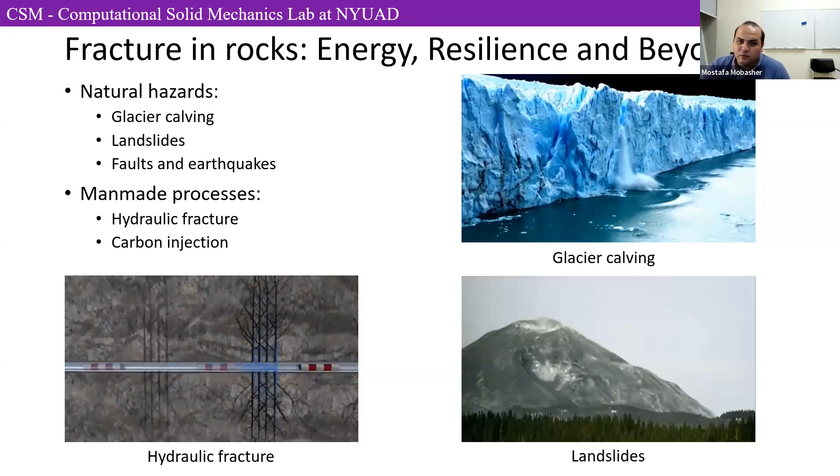Now, among the many challenges in modeling damage or fracture in geomaterials, these are probably the three biggest ones, and the interests of research in my group. The first is the need to understand that fractures are not just thin lines between rock granules, they're really networks of long-range cracks and microfractures that spread spatially and across scale. There are also networks of fluid flow. Depending on the material, there are capillary networks across scales that transport fluid from one place to another. Many existing models do not account for that. So in the research I'm going to present, we propose to account for these effects using non-local modeling for both the damage processes and the fluid infiltration.

The second challenge, which I'm sure many people are aware of, is the elevated computational cost. The more physics you put into the model, the more nonlinearity and thermal or fluid effects you add, the model just becomes prohibitive, we cannot train them anymore. So how do we address this? How can we leverage the newest tools to make this better? And the last challenge, which is not very well appreciated in the community, is understanding the energy budget.

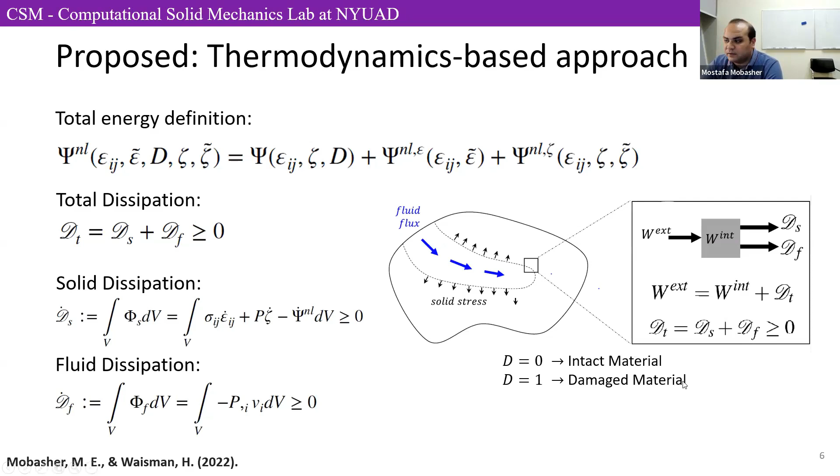Here in the work I'm going to be talking about, I'm basing it on continuum damage mechanics, which is a branch of modeling fracture. The simplest thing for those who are not aware: we assume there is a scalar variable that controls the stiffness of the material. When this d variable is equal to 0, it's an intact material. When it's equal to 1, it's a damaged material.

Now we proceed with the derivation. As I said, the first term is the classical damage poroelasticity term, which has been presented in the literature before, and this is the expression for it.

And then we have two additional terms, which depend on the difference between the local strains and non-local strains, as well as the gradients of that variable. And similarly, the difference between the local volume of fluid storage and the non-local volume of fluid storage, as well as the gradient of that variable.

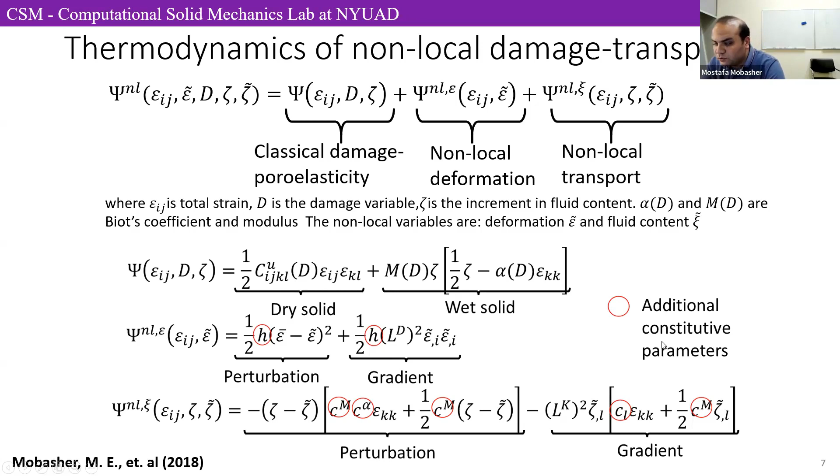And in order for us to introduce these additional energy terms, we need to also introduce some additional constitutive parameters. Now, in the limiting case, and we proceed with our derivation with the Clausius-Duhem inequality with the first and second laws of thermodynamics, we arrive at modified stress-strain relationships and modified pressure-zeta relationships.

But in the limiting case, when we want these models to represent what we are currently modeling, if you take these models in the limit where these additional constitutive parameters go to 0, we actually see that these additional terms drop out, and we end up with two additional gradient relationships. The first one is for the strain or stress regularization. The second one is for the non-local transport effect.

So now let's look at each one of these. The first one provides the non-local damage. So here, this is the stress-strain relationship, and this is the pressure-fluid content relationship, both of which are a function of damage.

In this case, we start with a simplistic linear law for damage, but in other papers we use other phenomenological models for damage, and we calibrate and validate these. Then we have a non-local equation, a gradient equation, which provides the non-local stress of which damage is a function. And then we have the damage-dependent Biot's modulus and the damage-dependent Biot's coefficient.

And the purpose of these relationships is to basically represent what happens in the fracture process zone. This is a function of a region which represents the size of the fracture process zone, represented here by the variable g.

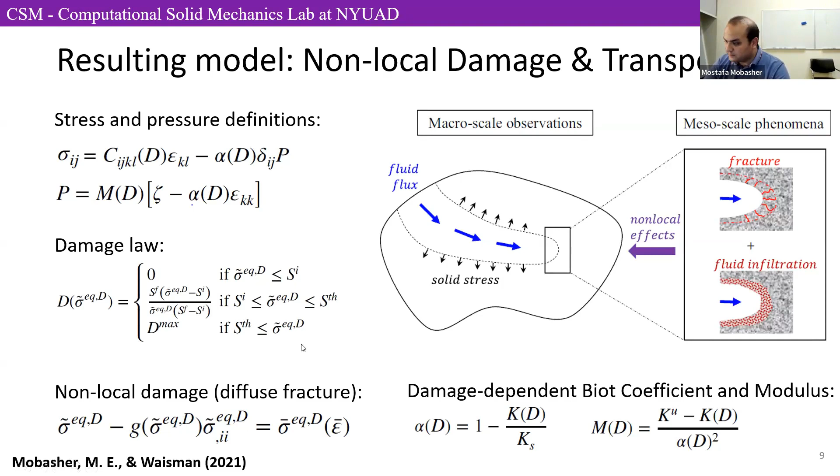Now we get to the less common concept, which is the concept of the non-local transport.

When we put simply Darcy's law or even other types of fluid flow in porous media, we're basically assuming that the fluid flow at the material point is only driven by the values of the stresses, strains, or permeability that we are calculating locally. In reality, porous materials do not work like that. There are scale effects and porous network effects.

Several experimental and numerical models have shown that in order for us to understand better what's happening, we need a non-local transport, and there are different ways of doing that. We need to understand what's happening in the vicinity of this point and based on that, calculate where the fluid particle will go. Now we're dealing with Eulerian models here, so we don't really track a particle, but we can still plot the streamlines of where the fluid goes in a hydraulic fracturing simulation.

So here we are proposing this based on the thermodynamic derivations that I have postulated. We can reduce them, instead of the relationships on the fluid content, to a non-local permeability, which we have then extended to an anisotropic non-local permeability, with the mathematical proof here.

After we did this work, we found out that this relationship is very analogous to the Darcy-Brinkmann flow equation. We realized that the size of this interaction zone is L squared, and this L squared would be equal to beta, the friction coefficient in the Darcy-Brinkmann flow. We actually discovered this the other way around: we started from the non-local modeling idea, and found the resulting thing is very similar to the Darcy-Brinkmann equation, with the friction coefficient providing a very similar effect to what we're proposing with the non-local effect.

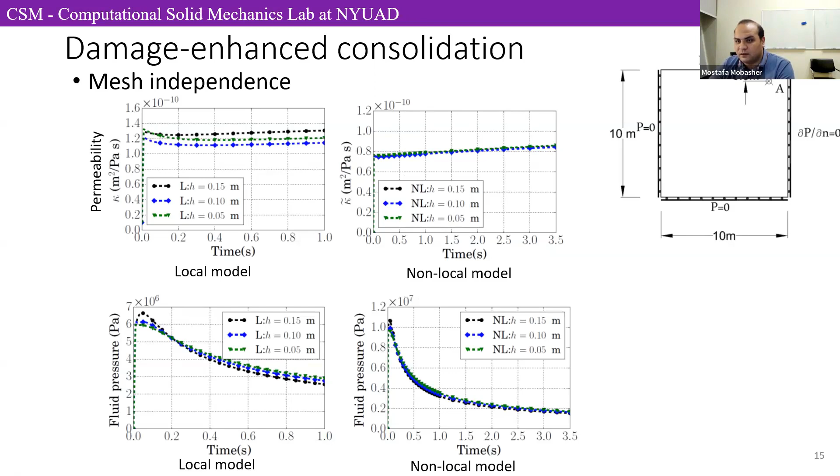It's achieving what it is supposed to achieve in terms of representing the physics. Now we get to the next question: what happens to the energy? We're pumping fluid, so we are spending energy here. Where does that energy go?

So where does that energy go? If you go back to the initial diagram, we have a W external applied, and that gets spent either by elastic energy stored in the system, or, up to this point, our model does not have... or energy that's being dissipated.

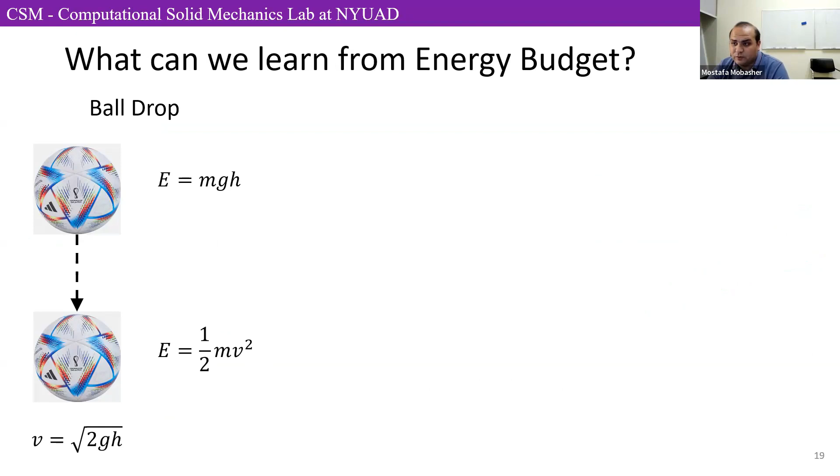In applications which involve tremendous damage, like hydraulic fracturing, or car crash worthiness, knowing where the energy goes is pretty much everything. You need to design your system to dissipate the energy in a certain way.

In hydraulic fracturing, we also want the energy we're applying to be used to stimulate the reservoir. We don't want to just spend the energy on opening networks or on fluid viscous flow through a network that's already been opened, without getting any bang for the buck.

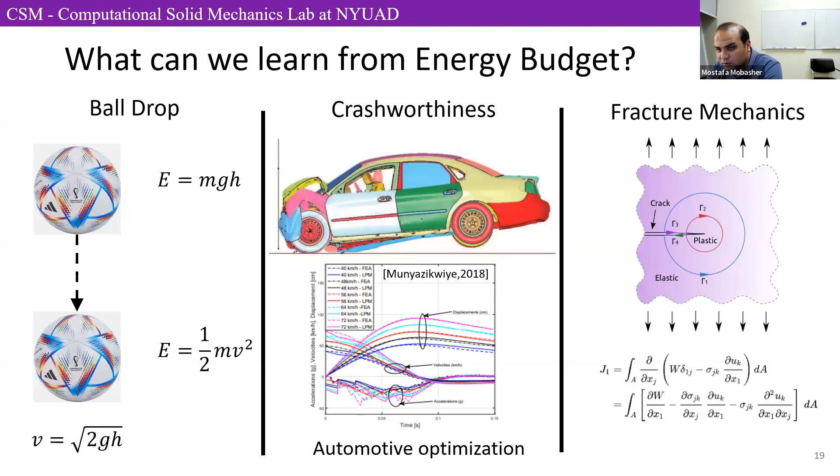And this gets us to fracture mechanics, and the fracture mechanics theories themselves are postulated from the concept of energy. So how is the energy spent? That's the question we're trying to answer.

There are some studies out there, but really limited. One is experimental. There's another by our chair, Professor Bunger, also based on linear elastic fracture mechanics, so it doesn't account for fluid flow, permeability changes, or the multi-scale networks that are happening. So there's a need for a better way to understand the energy budget in hydraulic fracturing.

And this is what we're trying to do here. Since our model is based on thermodynamics, we have access to these mathematical formulations. We can compute them numerically and see what happens. So let's start by playing a bit with the model we've postulated.

Let's take the Q, the injection rate, and increase it to Q, 2Q, and 3Q. Here I have two plots: one is the length of the fracture versus time, the other is the volume of the fracture versus time. As expected, the faster you pump, the higher the Q, the higher length you get—say at time 0.2 by 10 to the 5—and you'll get a longer fracture and a larger volume.

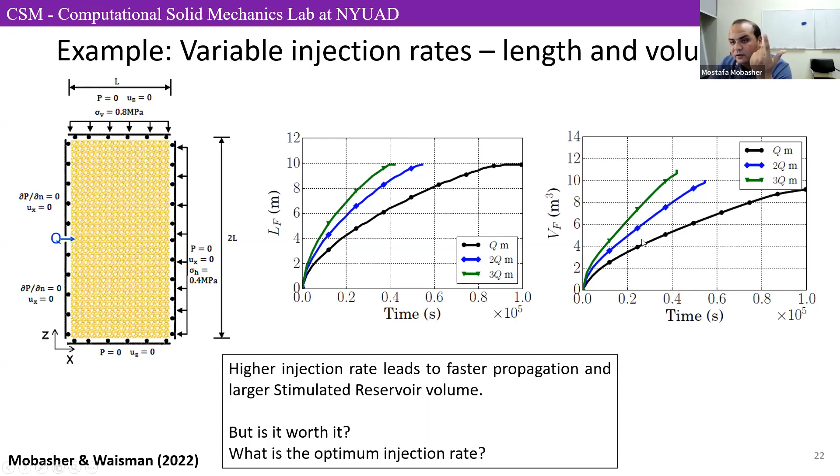Another thing we started looking at is how the fluid-driven fracture interacts with pre-existing weak zones. We consider two weak zones. The first one we call weak zone A. In this case, we have an intact stiffness but high permeability. This means we have another type of rock, geomaterial, or soil material with higher porosity - like going from shale to a part where there is sand. So it's a high porosity zone, but it's still intact, still has high stiffness. The other one is pretty much an open fracture - low stiffness, high permeability zone, like a pre-existing fault, either man-made or natural.

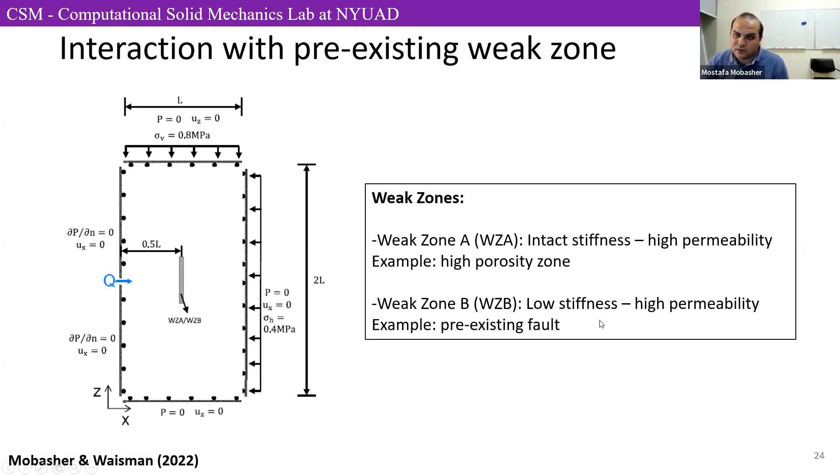We started running our model. We got the damage or fracture contours, and then compared them to fractal analysis and some acoustic emissions. Our results are pretty much on the same ballpark - we see the same fishtail trends, the same trends overall. There are more details on the specific verification and validation that you can find in these papers.

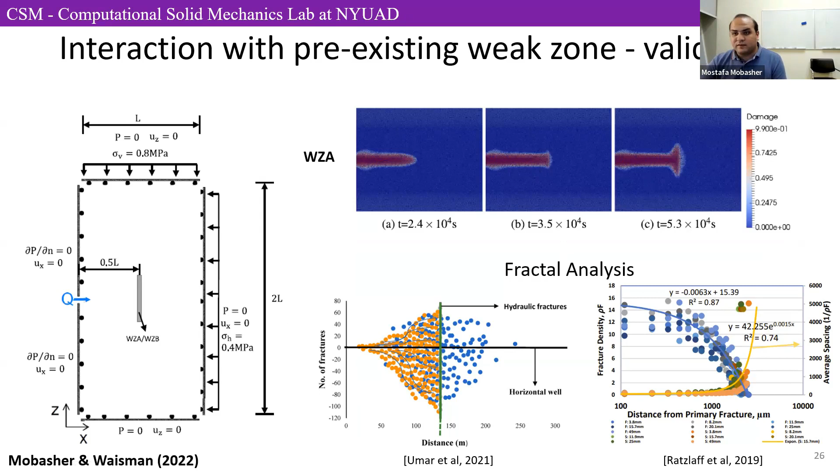Let's look at the energy. Let's look at the money that we're spending into pumping. Where is it actually going? Are we actually gaining what we are trying to gain from this?

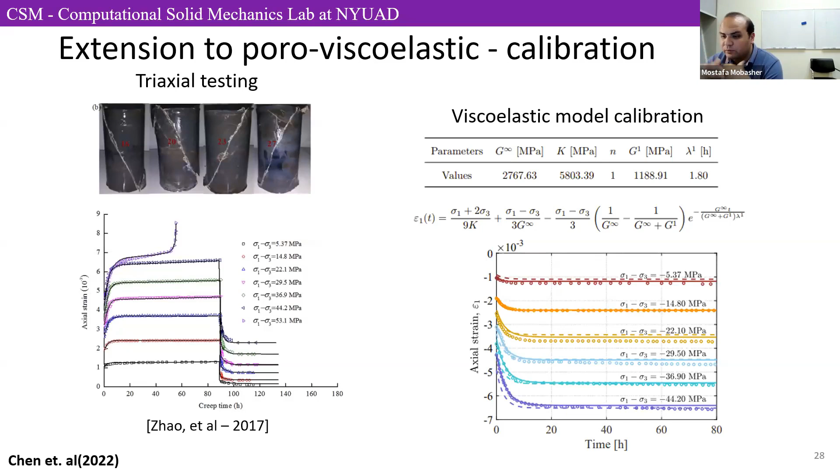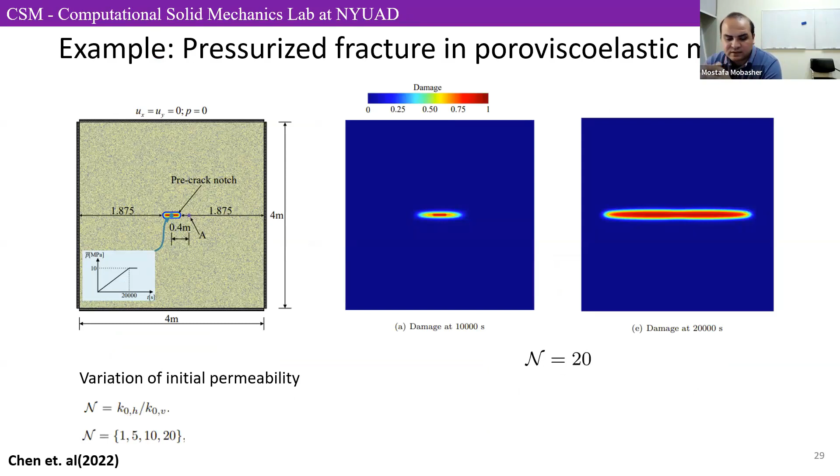We took the same model and started extending it to more complex material properties. We understand that in some cases, viscoelastic effects, time-dependent effects are important. So we calibrated the model's viscous parameters with triaxial testing data from the literature. We calibrated the parameters, then started testing with different ratios of initial permeability and different values of viscous response. Here we have different values of permeability anisotropy - n equal 1 is totally isotropic, up to n equal 20, which is very anisotropic between the vertical and horizontal direction.

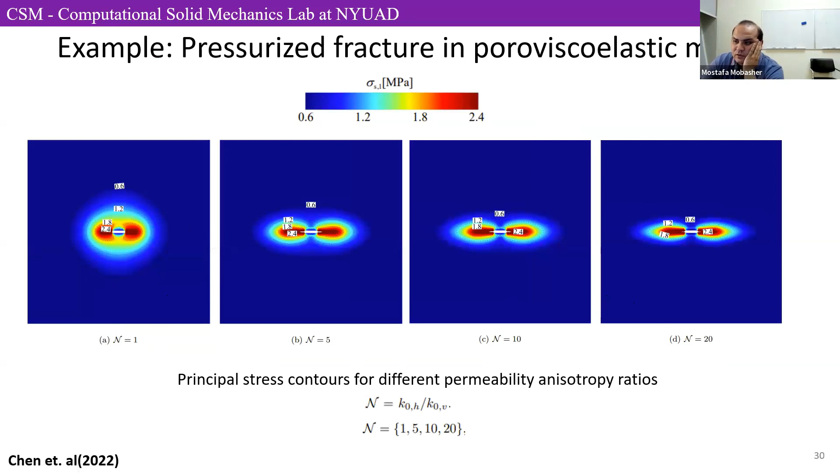So to conclude this part, what we're trying to say is that looking at fluid-driven fracturing through the lens of the energy budget could be enlightening and could show us different physics than what we see just by looking at our traditional models, especially those dominated by just linear elastic fracture mechanics. Once you start including these additional nonlinearities in the model, you start getting better insights.

Now, if I'm a practical person - and as I said, before coming here to NYU Abu Dhabi, I used to work for the industry.

Okay, this is great. All of this is great, but these models, we cannot run them in practice, period. They're very expensive to create, very expensive to run. The size of the domains we're considering here are very unpractical. These simulations take hours, days, maybe weeks to get a reasonable answer.

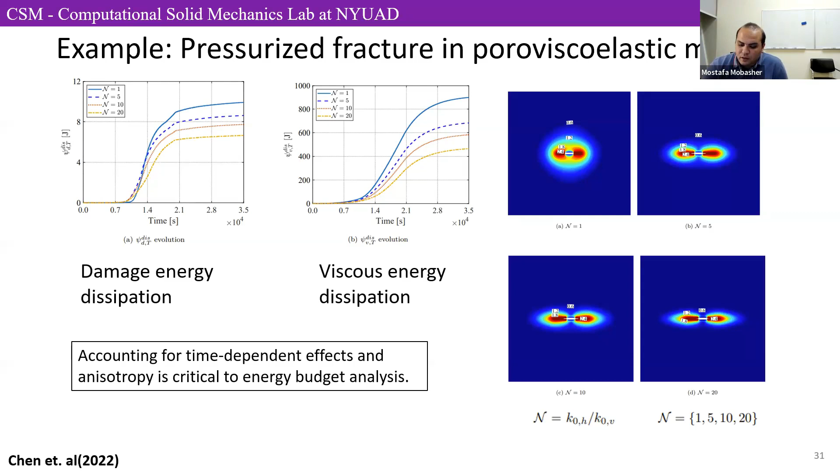So what are we going to do about it? Which brings me to the next step. Our group has started a new endeavor, which we call integrated finite element neural network. Basically here, we're trying to leverage neural networks not to replace what we are doing with the typical analysis, but to improve the current state of the art of nonlinear and multiphysics models.

But keep in mind that this neural network will still sit within the same framework. So it's not going to give me an answer just based on the network predictions. It's going to give me an answer based on the minimization of the residual, which represents the weak form, the residual equation, which then conforms to the physics that we are trying to solve at the end of the day. That would be, in our minds, that would be great.

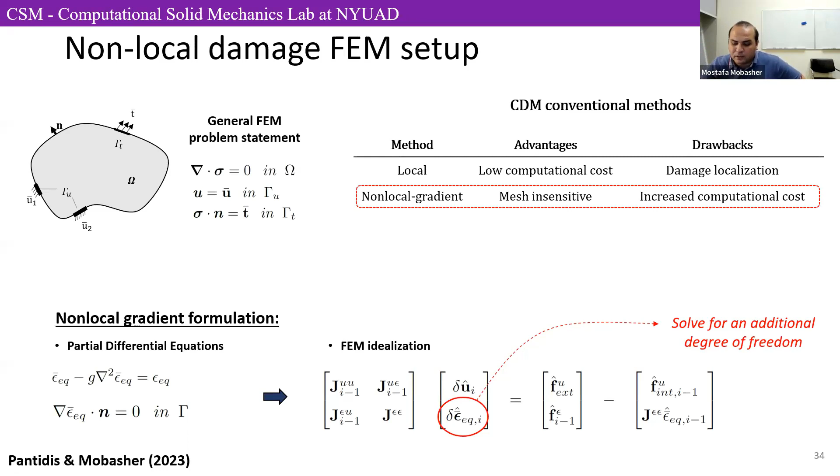We trained a neural network to basically represent this equation using a physics-informed neural network. In this case, we're talking about sequential MLP, multi-layer perceptron networks, for every time step, which is, of course, very expensive, but we're going to improve that in a second. This is to do the mapping between the local strain and the non-local strain.

And once the non-local strain is calculated, it is plugged again into the same elasticity equation, damage equation that we have. By doing this, we have eliminated the second equation. We've reduced the size of the system of equations that we're solving, but we're solving the same system. And while we're doing this, we are predicting the non-local strain and also its derivative, and plugging it in.

Now, the actual test of whether this is working will be: well, does this I-FENN system converge? Does it work? Does it give us the right answer? Which we'll see in a minute.

So for every time step, we're training a specific network to predict that, which of course is very unpractical, but it's our first step as a proof of concept.

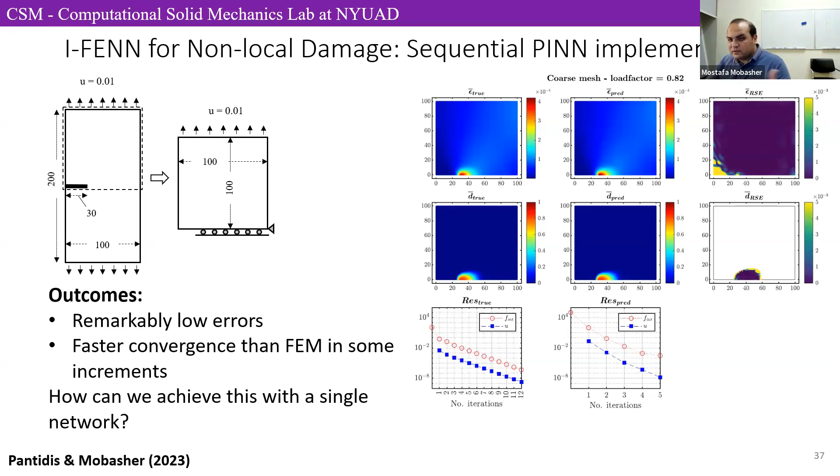Now the question is, how can we do all of this with a single network? How can we train just a single network that can do this problem for us for different loading cases? Which got us into what we call now the physics-informed temporal convolution network.

Now, this is another type of sequence-to-sequence modeling that we introduced to learn physics as well. I don't think we have the time here to explain the specifics of temporal convolution networks, but this is in the literature, and this is not something we came up with. The temporal convolution networks were there. We made them more enhanced by introducing the physics-informed character to them.

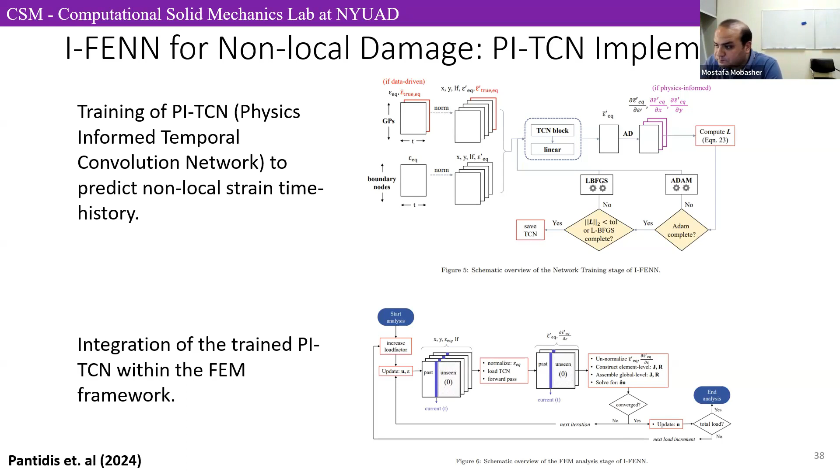And then we involved them again into our finite element analysis procedure, and then we started solving the same problem again. So for the same problem, again, we're seeing very consistent convergence. We started seeing time savings, which here are not great, but they are starting points.

So we're talking about 10 and 20% in the very first trials of the method. This is something that we can build on. We started modeling other geometries, other loading conditions.

So, as our cracks get longer, as our damage zones get longer, we usually have convergence issues. Sometimes the finite element models do not even work. They are unable to give us results, or they take too many iterations or too much time per increment.

What we have seen is that the I-FENN, even when finite element is struggling, when we try different solvers, I-FENN is doing pretty well, and it's giving us a very efficient solver at the end of the day.

So now we have done this for non-local damage. We are currently working on developing this for poroelasticity, but before that, we wanted to try with a bit of a distal version of that. So we started with thermoelasticity, introducing thermoelastic effects. Again, the idea is very similar.

We are solving the mechanical weak form. We're solving the mechanics problem, and we're using the neural network to predict the temperature and plug it back into the mechanical equilibrium equation as an input, and use that to solve the problem.

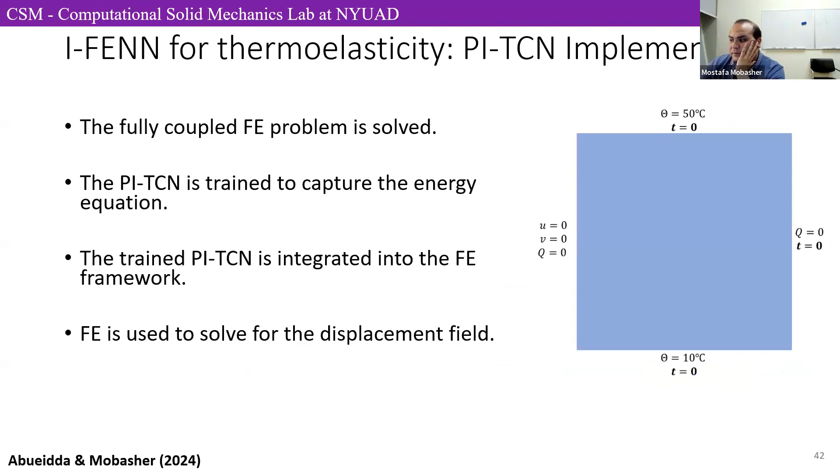This is our first trial problem here, just a plate with some boundary conditions, and we're getting very interesting results. Basically, we're training the model on a coarse mesh of 700 elements, and then we're trying it on a 7,000 elements model. This is something that we usually need in practice.

In order for us to resolve the stresses and know what's happening at the crack tip, we usually need very fine meshes. But in some cases, modeling such physics on their own can be done on coarser meshes, and these two solutions can be combined.

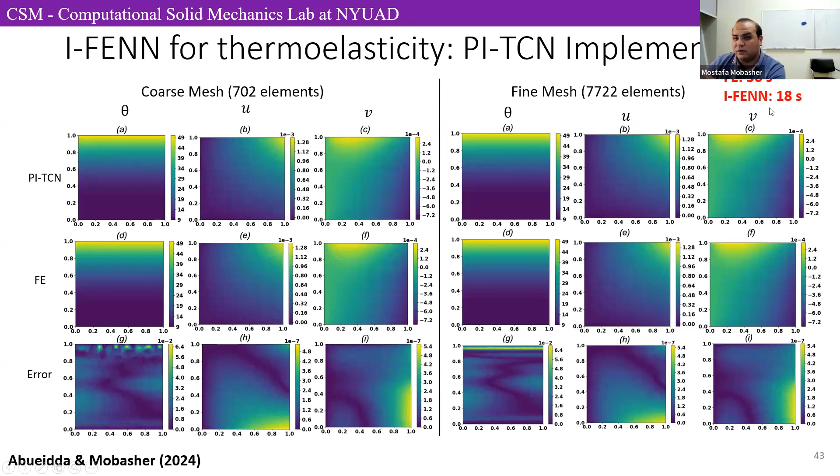So long story short here, finite elements is taking, for example in this case, 36 seconds, where I-FENN is taking 18 seconds. So we wanted to test this further.

We extended this not only with the PI-TCN. We have another paper coming up where we introduced a network that learns from the variational form. So it learns from the energy principles of thermoelasticity, which we think will be very valuable once we get to poroelasticity as well.

We also tried to replace some of the automatic differentiation that the neural networks are usually based on into learning using some pre-computed shape functions, since we already have the finite element models, or we have access to them and we can use them.

These are our initial trials. SFAD is the first model, and as we go further downward, we kept becoming more competitive with the finite element solutions.

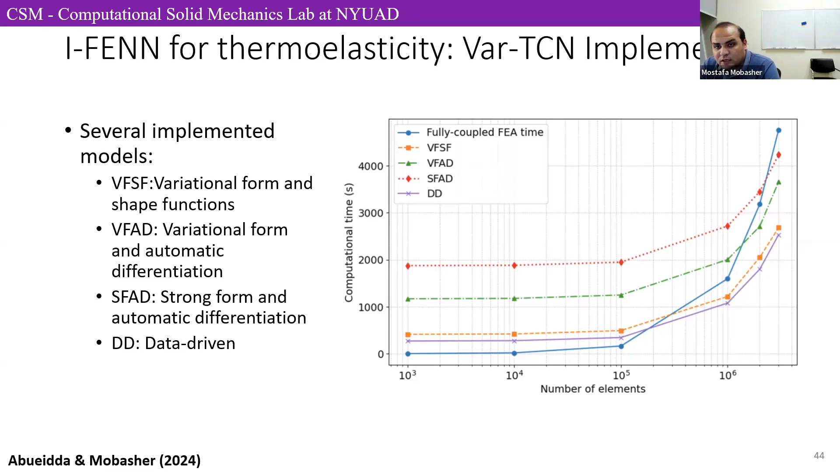So this brings me back to the starting point. There are three challenges we are trying to address in this research: representing long-range interactions in terms of damage mechanics or fracture mechanics, the elevated computational cost, and understanding the energy budget.

For the first one, we are proposing non-local models to help us understand what happens around the crack tip in terms of fracture, damage, and fluid transport. We're able to verify and validate that model against some available experimental data.

We started using this model since it's formulated from thermodynamics principles, so we are able to analytically derive the energy storage and energy dissipation formulas, compute them analytically, and get insights from them. We have presented that as well.

Realizing that as we add more physics and more nonlinearities, our models become very expensive, we're now working on this new idea called I-FENN, integrated finite element neural networks, in order to limit the cost of these simulations. It's all work in progress.

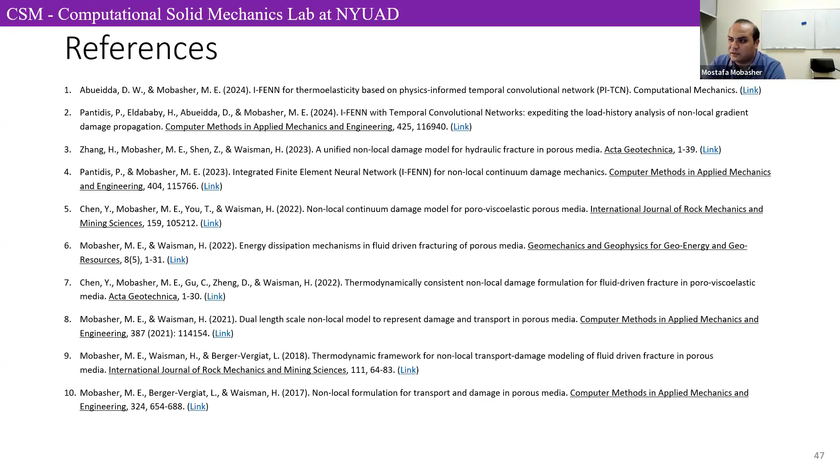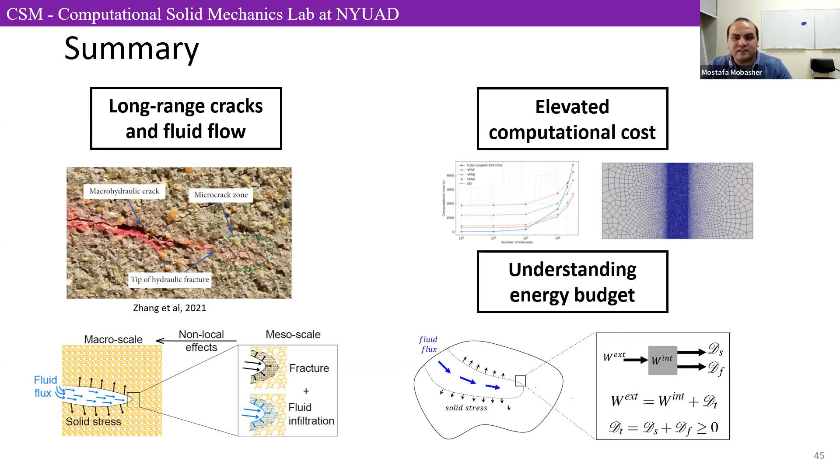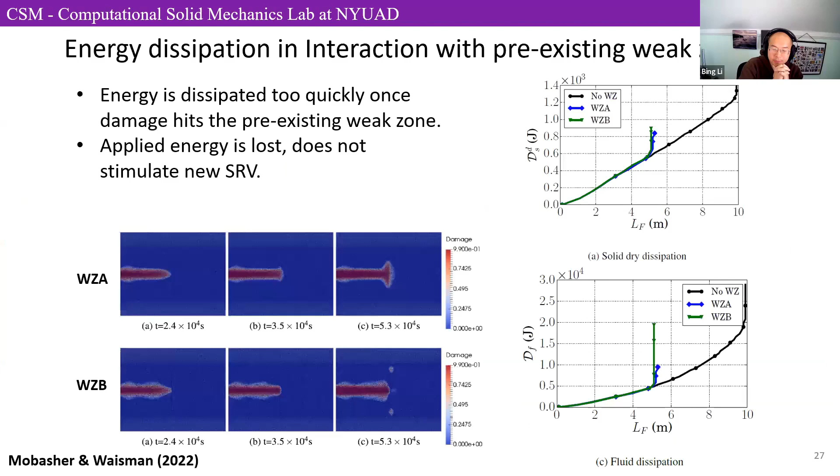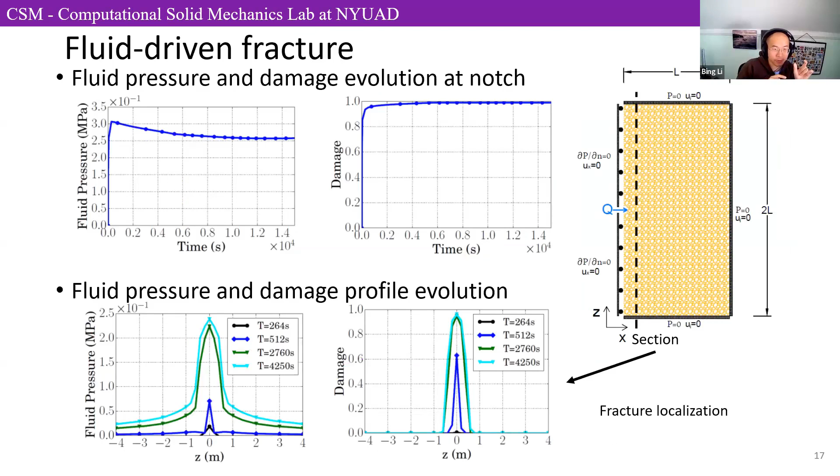So on slide 17, you show the damage zone quantification, and you're focusing more on the length of that damage zone. You were talking about the evolution of that damage zone. I was wondering if you could talk about the width of this damage zone—is it sort of consistent across the geometries or materials and all that?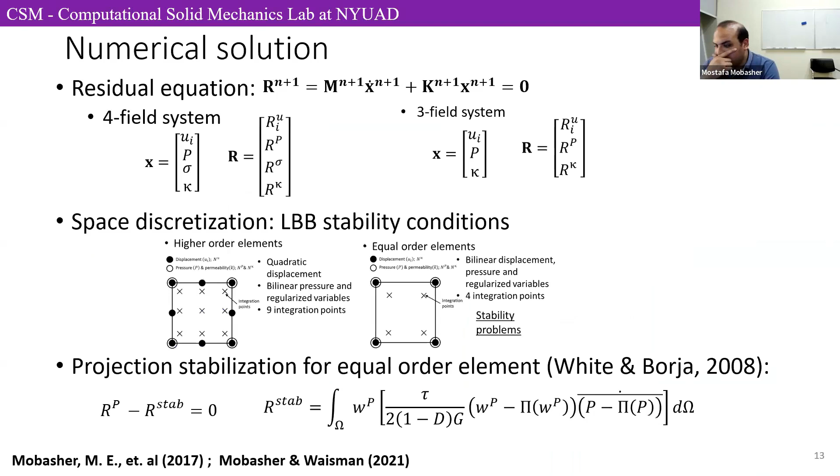So that will depend on several variables. It will depend on the permeability, how fast it changes. It also depends, in this specific model, on the values of the length scale that we use. Let me get back to this—you see here we have two equations, one for the non-local stress and one for the non-local permeability. The non-local stress is what governs the damage, and here we have, in the case of constant, constant and non-constant length scales. Basically, the width of the damage zone will be governed by these two length scales.

We have this paper from 2021 with a specific study on what happens when one length scale is different than the other. You see that in some cases damage overtakes, but then it stops at a certain point if permeability is not going that far, because if you don't have fluid going that far, then nothing will open the crack.

And the same way otherwise. But we see a stronger effect from the permeability length scale than the damage length scale, because when you have a larger length scale for the permeability, you have fluid going into further places.

This is true in the beginning of the fracture, closer to the tip, closer to the notch. As you go further, it develops its own new equilibrium - I don't want to say steady state because it's still a function of time. In our 2021 paper, we have a very detailed study on the interaction between these length scales and what they do to the damage zone and the permeability zone.

This is something I probably didn't say. When you do a linear elastic fracture mechanics model, usually you have an open crack, you calculate the crack width, then put the fluid inside it, and the fluid will exert pressure on the sides. This is how you represent hydraulic fracturing in this context.

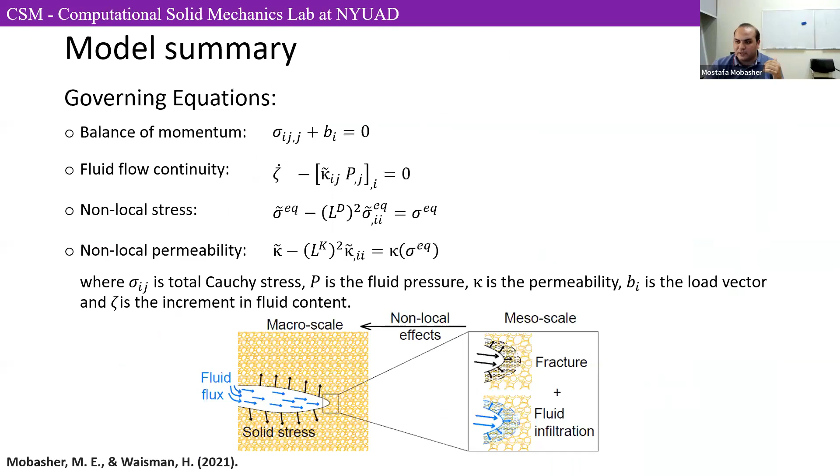Coming back to that real picture from the beginning, it could be, depending on the type of material, the inherent anisotropies and inhomogeneities, the way you frack it, the way you're applying the load, you could have different setups of these two networks. One of them could be larger than the other. It also depends on the multi-scale porosity networks.

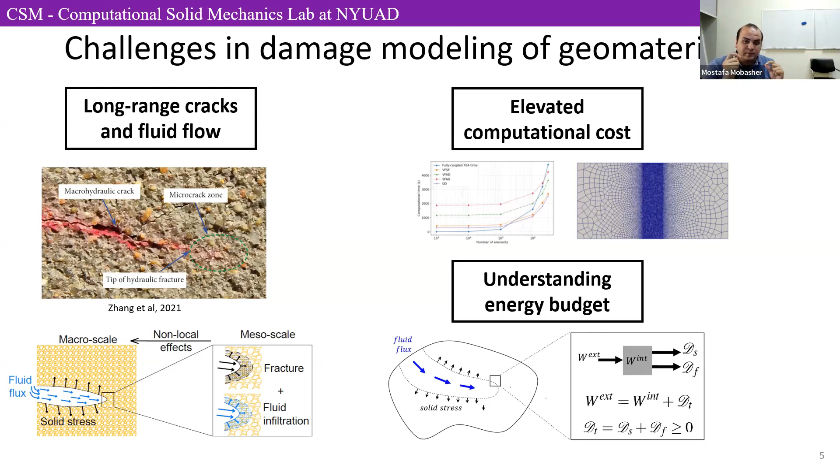So this idea of non-local transport comes in - these capillary networks can be very, very long, and they change the pressure gradient, change your overall permeability, and change how your fluid grows. So just looking at a single material point, we found that to be not very representative of what happens in reality. You need to use a larger lens to understand what's happening.

Very interesting. So the non-local transport is not poroelasticity - it's simply pressure gradient forming in a very predefined path, essentially. Yes, okay, yes, okay, oh okay. Very cool. Sorry, I'm kind of dominating the conversation.

Any questions from the audience? Once again. Okay, if not, I have one more - that's

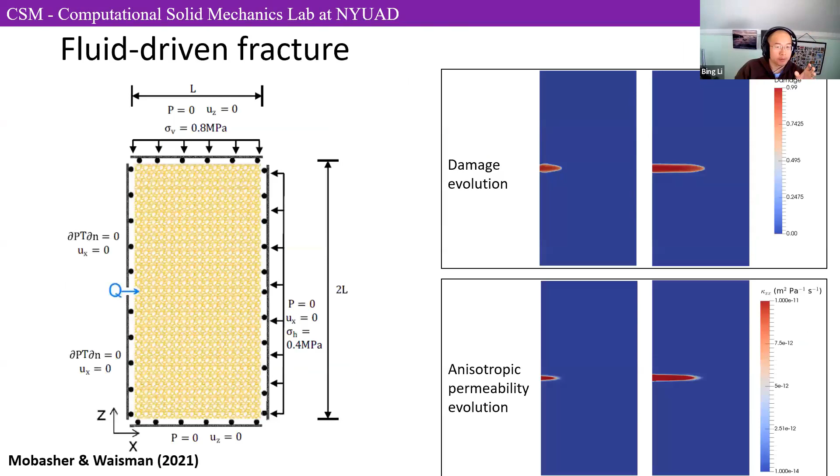A curiosity point: in the PINN, the second one - is that still being trained per geometry, or has it come to a point where it's a general pre-trained network for any geometry? So everything that I've shown so far is trained for a specific geometry.

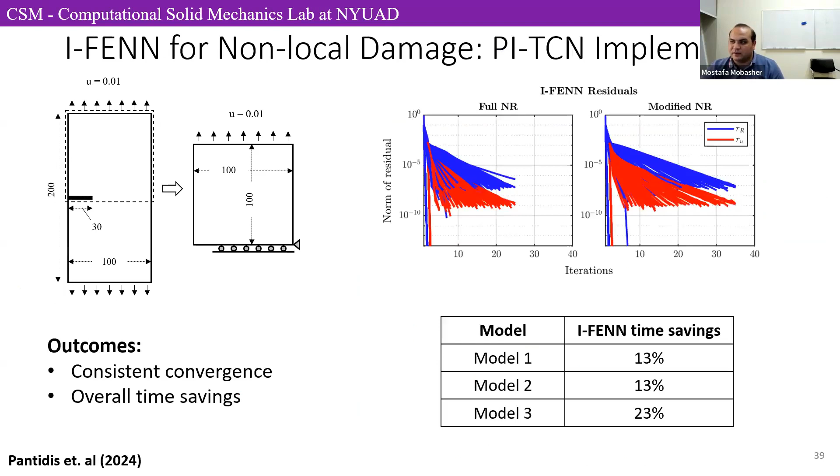We have ways of dealing with that, and there are some methods in the literature that people have started doing. But we see bigger ticket items at this point. There are mapping methods and things you could do to make it learn on one geometry or on boundary conditions. There are operator networks that can help you do that.

There are mapping methods, but we are seeing a fundamental issue with predicting phenomena over time. Right now, the two options available are either using sequential step-by-step networks, where you have to train a step for every network - these manage to predict very well and interpolate well in both space and time, and can even in some cases extrapolate. But it doesn't make sense to train a network for every time step. This defeats the purpose.

So once you start going to sequence models, which can predict over time, they have some deficiencies - they just predict sequence. They were not made for our applications. They came from text recognition, from predicting lingual things. They are not our problems.

We want to have functions that we can use. We need an f of t to understand what happens between t1 and t2. So we are now working with some new approaches fundamentally different from sequence to sequence. We're seeing some preliminary results and some preliminary challenges, and we see this as our bigger ticket items. But the question about geometry and boundary conditions is also very interesting - let me tell you something.

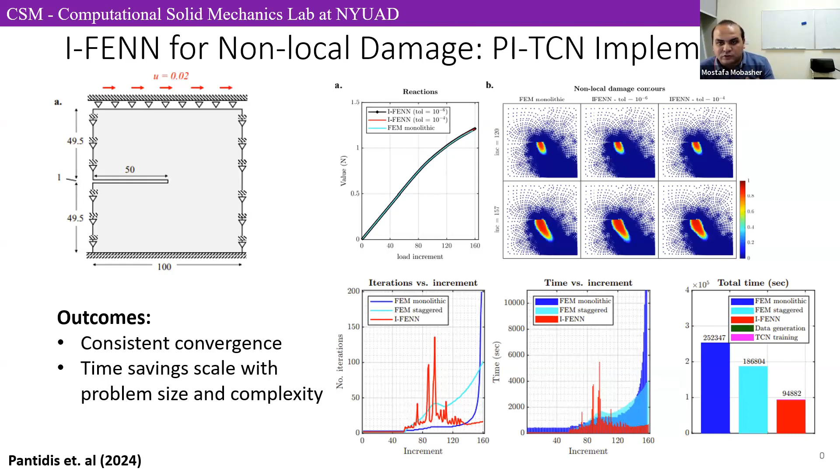Specifically, hydraulic fracturing could be one of the most suited problems for this type of I-FENN formulation. This is simply because, in most cases, our geometries look the same and our boundary conditions don't vary that much from place to place. The confining stresses could be different, but they don't vary that much. It's not like designing a car, where every car has a different geometry. At the end of the day, we work with 2D or 3D planes, with end conditions and confining stresses that can have different values. There are measures of anisotropy that we can make the model learn and randomize with some probabilistic infusions, and we can get away with it. So I think geomechanics is a very good candidate, and there's a lot to be done with neural networks in general and with this I-FENN approach.

Very cool. Richard, you had a question, please. Yes, very good talk, Professor Mobasher.

I was wondering if you had any familiarity with mixed neural network finite element methods, where instead of representing the displacements or velocities using polynomial functions, we represent them using neural networks. These formulations are touted to be more efficient than standard finite element techniques.

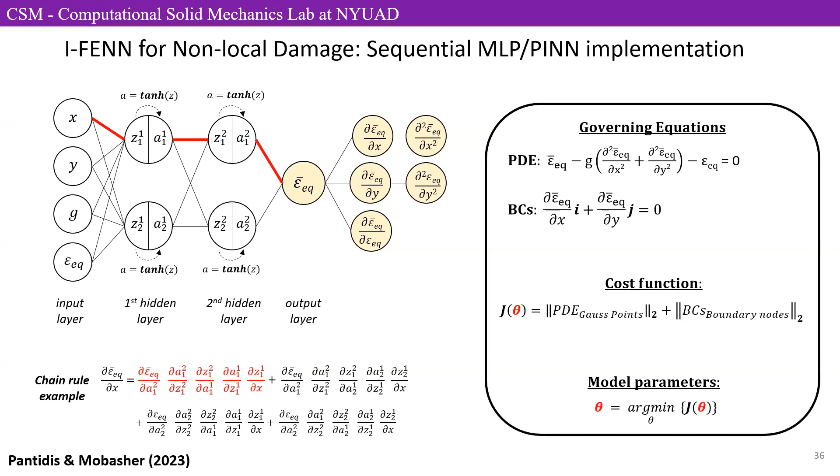Yes, so there are a couple of them. There's a hybrid one, at least the ones I can think of. There's one called HFEN, hybrid finite element neural network method, and another called DEM, deep energy method, and both are doing basically what he said. They're replacing the approximation functions with networks. They're very good, and the papers are very promising.

Now, from hands-on experience, these methods become difficult to scale when you have more practical, more difficult, more nonlinear, more realistic problems. So when you see the papers, they look very impressive on small toy problems. But start introducing something more difficult and it doesn't work, because they lack something. This is my opinion, don't take it as fact - this is what our experiences have led us to conclude.

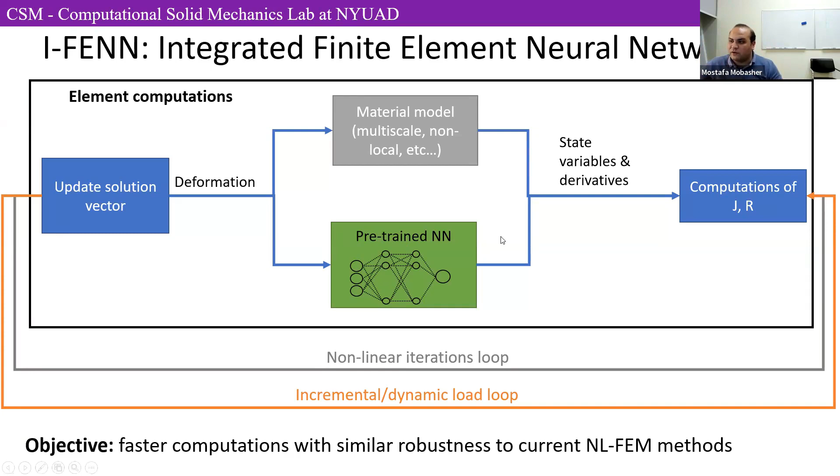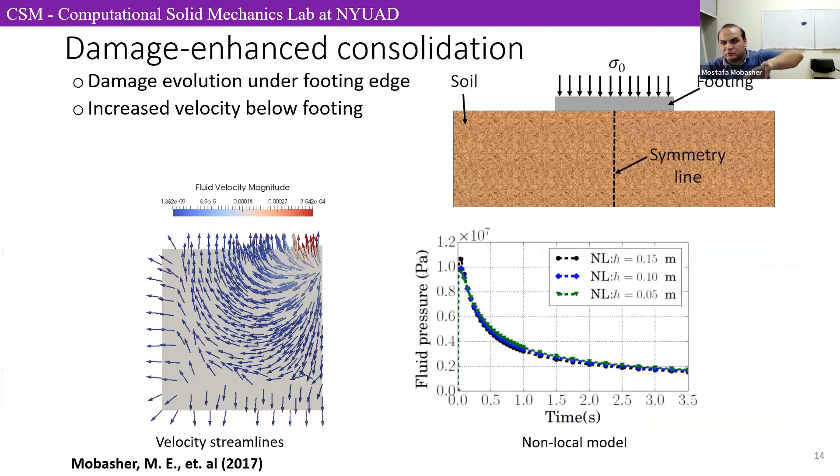They lack this framework. Finite element has been around for 40, 50, or 60 years, and the rigor of the nonlinear solvers and multiphysics solvers has been developed step by step. It all counts on the minimization of a residual function. At the end of the day, we convert the strong form, the partial differential equation, into a weak form, and we minimize that form to zero to make sure we're actually solving the problem. So this is the objective of the nonlinear model - you can call it the objective function of the nonlinear finite element model - to minimize these residual variables.

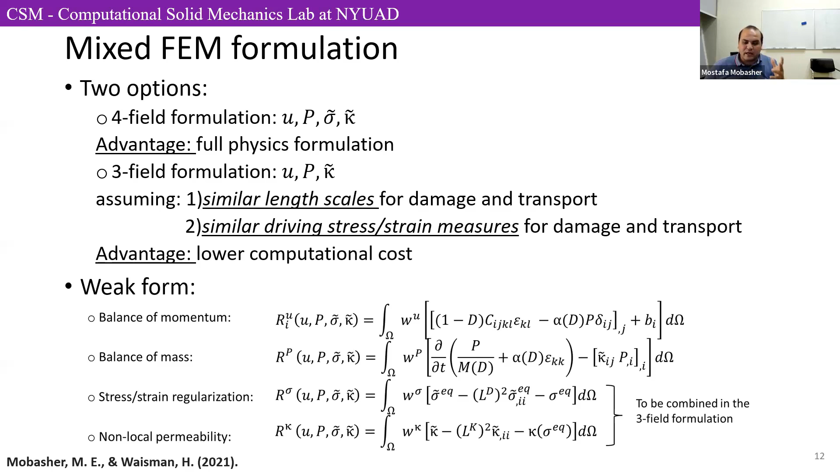Now, if you do not bake this into the methods you've mentioned, there's no guarantee, no matter how well you train them, that in more difficult problems they won't fail. This is from hands-on experience, because among our big team of people who came from different backgrounds and put their input into our research - some have written some of the most impressive papers on deep energy methods or other methods - their input was that if you take it to a more complex problem, it doesn't really work.

Okay. Thank you. Thank you. Thanks for the question. Any other questions from the audience? Please do not be shy. Or please leave it in the chat if you are shy.